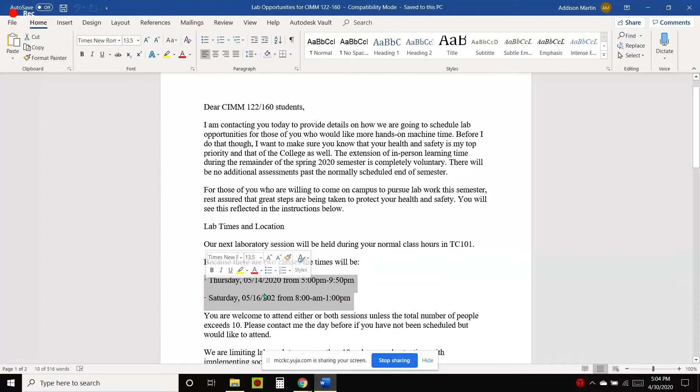I've got this Word document that is kind of explaining the lab thing that's going to be the week after class is actually over, and pretty much taking the first 9 people really, because there can only be 10. And you're welcome to do this. I'm going to be down there on Thursday the 14th and Saturday the 16th during these times. And I'm going to post this as an announcement. But they will be requiring you to wear a mask. So all the information about that will be in here.

I just got this last night. They're kind of flying by the seat of their pants on this. So most of this terminology was provided in a letter to me. And I changed a few key things about it being totally voluntary and it doesn't go towards your grade. Some classes are different because they have different requirements.

But I'll post this after class tonight, and also my daughter has a recital. It will be after that. So a virtual recital, because I originally wasn't planning on being here tonight, but since her recital got canceled.

Do I need to finish CIMM 151? No internship. I don't think so. If that is the case, if they tell you you have to, I think you can start lathe, and worst case scenario, I can submit a class override for you if they say that you can't for some reason. Particularly, I think they like you to have manual lathe first, but I've seen people take manual lathe and CNC lathe at the same time.

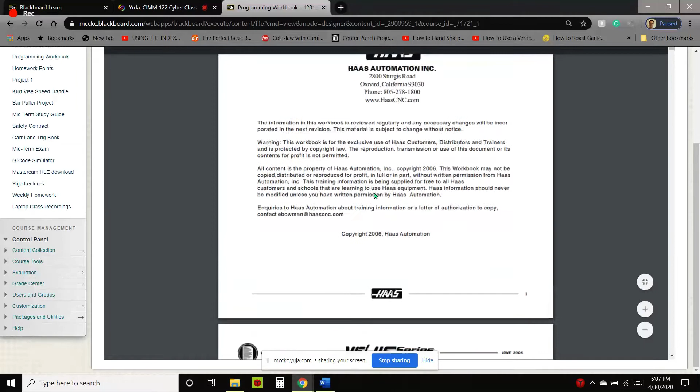So all right, everything that you need to know for the final exam is in the programming workbook. And the homework has really been structured around the final exam. And so just kind of go through here. You won't need to have your G codes memorized, other than filling in the blanks, just like the homework. In other words, it's going to be open book, open note, obviously, because why wouldn't it be?

I'm not really putting a timer on it, but it would be great for you to turn it in at least by 10 o'clock on Thursday. So we'll meet here next Thursday, and then I'll introduce the final exam and turn it on, and you'll be able to work on it. I'll be available for questions, but I'm not going to be like sitting here online, because that'd be dumb. So y'all can text me. I've got my cell phone right here, you know.

During the final exam, it's a comprehensive, like if you have a question about some verbiage or anything like that, how things are written. So this Haas manual is really well written for June 2006, it really is, because it's quite old at this point, kind of like I feel right now.

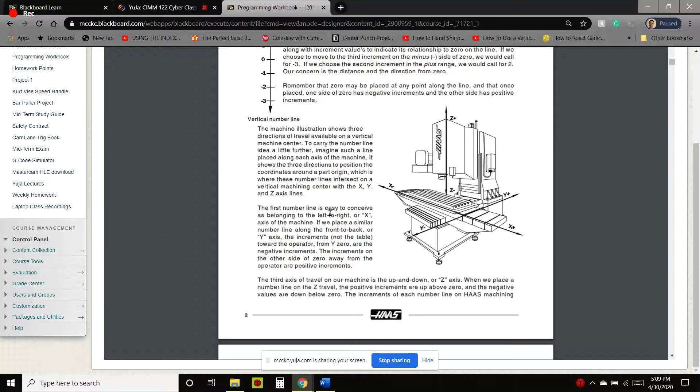So you might just kind of go through and review some of this coordinate system stuff if you need to. I haven't had a lot of required reading. For me, I always learn better by doing things, and I'm kind of a screw-it-up-yourselfer. I have to mess it up once or twice and then go back and finally do it the right way, and then I tend to not forget.

So this is real basic review here. The machine home is really, they're making it look like it's in the center of the circle, but machine home is over to the far right back. So it makes it a little easier to remember than this whole quadrant business. If I'm looking at the machine table and it's in front of me like this, anything that moves away from home 0 is going to be a minus direction. So this direction is X minus. This direction is Y minus.

By the way, I'm assuming everyone can see the workbook as I'm going through it. Yeah? Yeah. Okay, good deal.

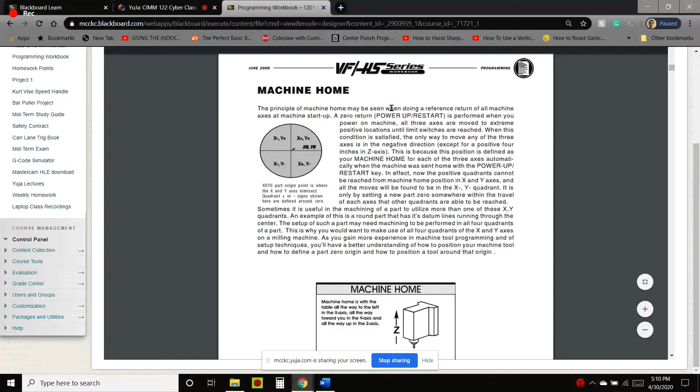So everything from machine home in Y going in this direction is going to be Y minus. And anything from machine home in Z, so this is a really great picture. If you're having trouble with your X, Y, and Z plus or minus which direction, this would be a great picture to refer to, because this is machine home. Anything moving away from machine home is a minus direction, Y minus, X minus, just like the arrows point, except this is pointing towards Z plus, which is confusing. So that's just that simple.

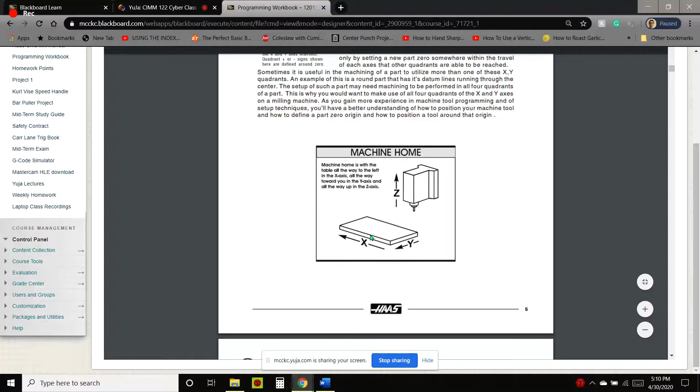The difference between absolute and incremental is as simple. I think the number line is kind of confusing, but it's always kind of difficult to explain things without using gestures. But absolute, again, is from wherever you position your part 0. Remember, we take our edge finder, position usually the fixed jaw of the vise in the left of the part or the center of the part in X and Y. And then we would make that our part home with G54 through G59.

But this position, my mouse wheel's acting up again. I really need to get a new one.

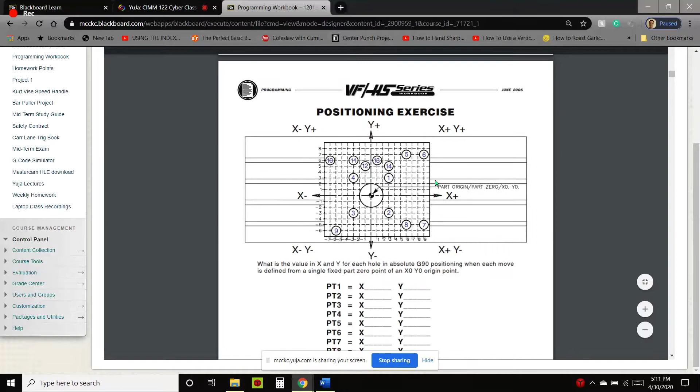I use my arrows. The machine position direction doesn't change. X minus is still, we're going way back to the first semester, X minus is still this direction. Y minus is still this direction. So if you remember which way minus is, then you don't have to worry about which way plus is so much. The G90 and G91, absolute, incremental. G91 is from one point to the next.

Jeremiah had a good point. On the drill cycle homework, he did his in incremental. So it was like G91, Y minus, whatever. You can actually use an L value with that. If you've got 10 holes and they're all an inch apart in X, you can say G91, X 1.0, L9, because your first hole would be drilled. And it would drill 10 holes.

It's really handy. I had a part at Procon that had like 1,100 holes in it. No kidding, 1,100 holes. I just meshed it and selected all the holes with Mastercam, but if you had to program that manually, it would be easier and take a lot less programming space to use an L command. Again, that's not going to be on the final. There I go, rabbit trailing. I was like, I'm just going to talk about stuff that's on the final, and I don't know if I can do that. I'm going to try.

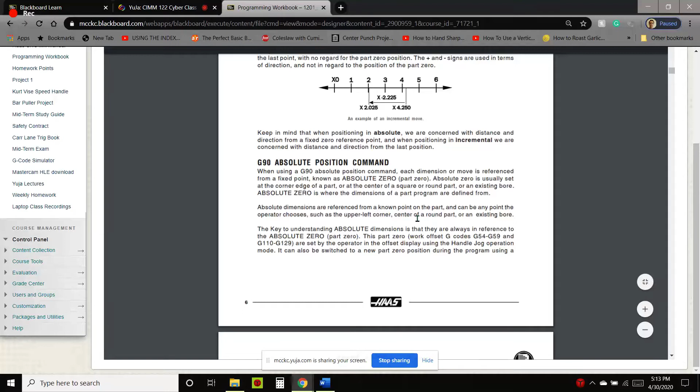So let's see. G91 is from one point to the next. So these are explained really well here. Does anyone have any questions about G90 and G91? That's probably going to be on the final in the form of filling in the blank for a program.

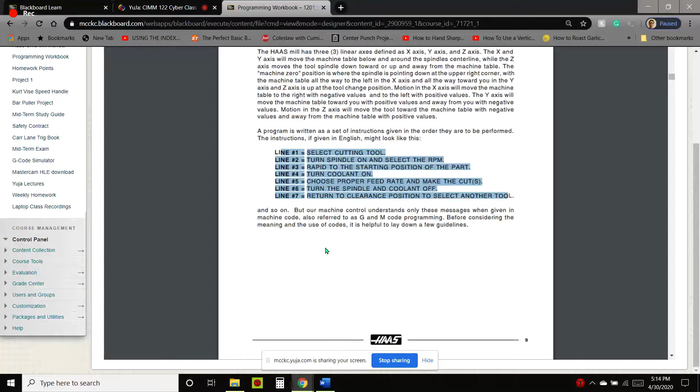So the format of the program on the final is pretty well spelled out for you. If you're in the advanced lathe class, you won't have that luxury. You're just going to get a drawing and then write the program from there. So a lot of this is review. It doesn't really apply to any geometry, so kind of skip over that. These are good things to know. I'm not going to spend a lot of time on that.

So the program's first couple of lines, and I had some of you guys sort of struggle with this. This almost never changes, other than where you're going to position X and Y, how fast are you going to turn the spindle based on your tool, and what is your tool number, because H1 and T1 always have to match in your program. M8, M3, these are all turning on your spindle, turning on your coolant for M8.

Good idea to tell it G90. Reason is because a lot of times before this line, you'll be in incremental taking Z home. And the last thing you want to do is leave this thing in incremental when you're repositioning your X and Y, because it's going to just move it from where it was to these values here, and it's probably not going to be where you want it. It's usually good to stay in absolute when possible. Seen a lot of tragic things happen by leaving the machine in incremental.

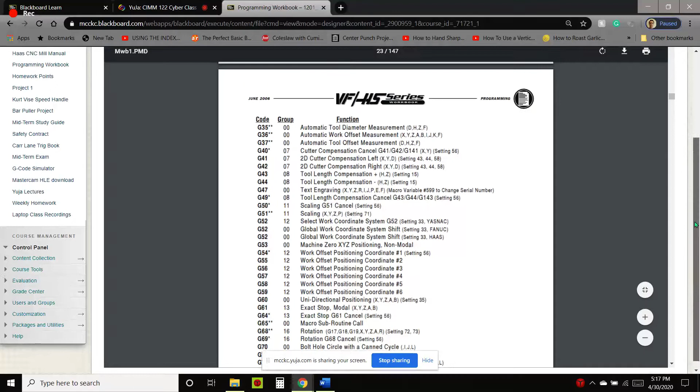You might want to keep in mind where this list of G codes is, because you're free to use the book for the final. So no more memorization. And my experience is that most past classes, I think this is my 5th time with this class, maybe 6, it usually probably takes more than an hour on average to do the final. 1 to 2 hours. And if for some reason you can't do the final next Thursday, you might just drop me a line. I'll work something out with you.

So these are your machine defaults. When you turn the machine on, this is what the machine is set to. So here's pretty much your safe startup line, with the exception of G64 and 69. We didn't really learn those. Exact stop is a thing that I believe is used if you have a problem with the machine overrunning. We run into that problem a lot with some of these flow toolpaths that just have thousands of lines of code and tons of processing. Sometimes the machine will get ahead of itself and it'll miss a point. And so the exact stop forces it to stop after every block. Just a little 401. That's not on the test.

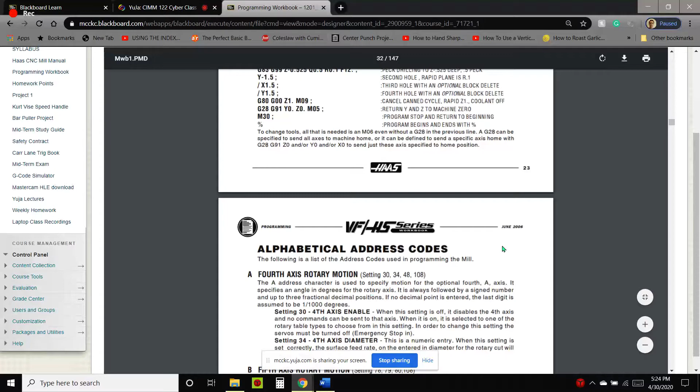One thing I do different than, I think, Dave Grady has a machining final and a written final. I've always shied away from that because I don't want people to be rushing around to try to get a part done and crash the machine. You know what I mean? So it just seems like a way more relaxed final exam, and nothing gets broken that way. I do the same thing in the advanced class. There's no real got-to-hurry-up-and-get-this-part-cut final.

None of this is really relevant. Well, I wouldn't say relevant, but it's not going to be something you're going to be quizzed over on the test. There's no I and J on the test, which some of you will be really happy about. Any kind of circular contours that you have to program are all done with the R value, and we'll review that as soon as we get to it. These are just kind of describing the different variables that you'll run into. So it wouldn't hurt to thumb through this week, especially closer to next Thursday, and at least have a good idea where stuff is in the book.

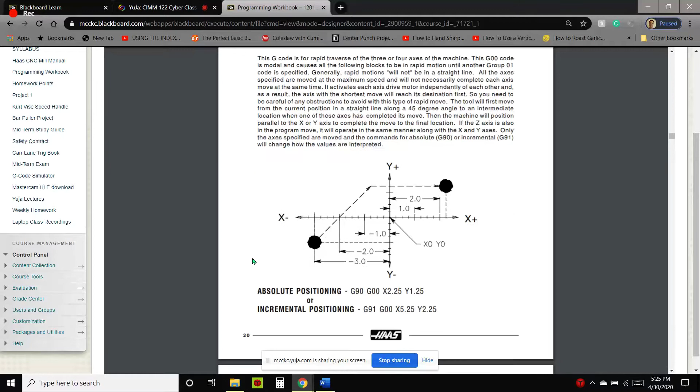Rapid positioning, a couple examples of absolute and incremental programming. Linear interpolation, so G0 and G1. Most of you guys get that pretty good. So here's a good example of a contour.

Now on the final, when you see your contour that you're in charge of programming, by the way, if you take the NIMS CNC final or written, it's a lot like this, where it might leave a couple things blank, and then you would have to fill in what the programming is on it. But pay careful attention to where your X and Y 0 is, because that is going to be,

That's my daughter singing with her teacher. Kind of distracts me.

So again, with cutter compensation, anytime you see this G41 or G42, you're going to program the exact geometry. And if you're struggling with this, it would help a lot to just circle each exact point that you're going to be programming on your contour. So in other words, this would have 1, 2, 3, 4 points. And think of it like an Etch-a-Sketch, where you're going to move Y up, and you're going to move X and Y, and then X.

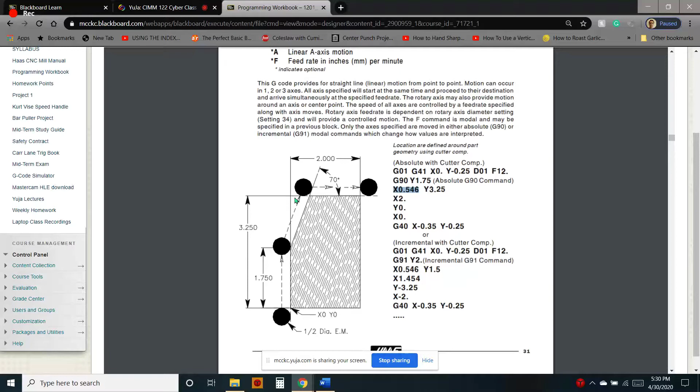So trigonometry is not hard, except my biggest challenge with trigonometry has been, where do you draw the triangle? Not solving the problem, because with trig apps you can solve the problem just by plugging in one side and one angle. In fact, SOHCAHTOA is kind of obsolete for me. I knew it at one time when I was studying for all my NIMS tests, but I quickly forgot it. It's not that it's hard, it's just one more thing to have to remember.

So trig apps are everywhere. Trig calculator, Symbolab. Oh, I don't think that's the one. No, that ain't it. There's trig calculators online, so even if you don't have one on your phone, which is what I recommend. Where is the triangle trig?

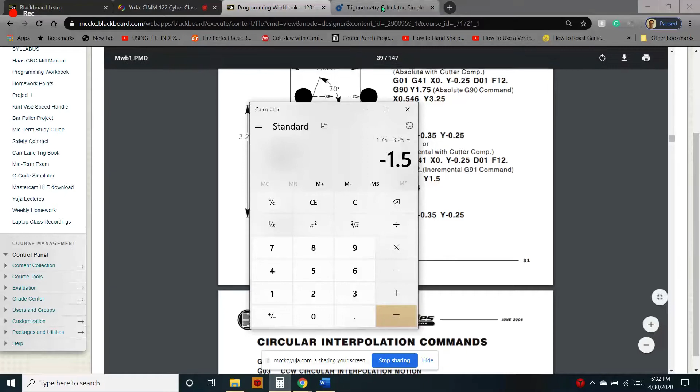So here's one. You can plug in any side or any angle and hit enter, and it'll fill in the blanks for you. So angle A is 20 degrees, and this was 1.750 minus 3.250, which was 1.5. I should have been able to do that in my head. And side B is 1.5.

See, it just fills in everything for you. So that's where they get that 546 right here. So X is 546 because it's just part of that triangle. Because from here to here is 1.5, 20 degrees here. Solve the whole problem with a trigonometry calculator.

Now there are people, like if you work at Honeywell or something, you're not going to be able to use your cell phone. But from what I understand, you do have access to computers, because they just don't want you taking pictures of stuff. So you could access this app from a computer or something like that.

And to me, it's just easier and faster than memorizing SOHCAHTOA, because you forget it really quick. Because most people say, oh yeah, SOHCAHTOA, it's, let's see. And by the time they do that, I've already whipped out my calculator and figured out solve the triangle. So the big point is this.

3.250 is exactly 3.250 from 0. 546 is exactly 546 from 0. And going to feed right over to X 2 inches exactly. So even though the cutter is on the other side of this, it knows to do that because you told it cutter radius compensation left.

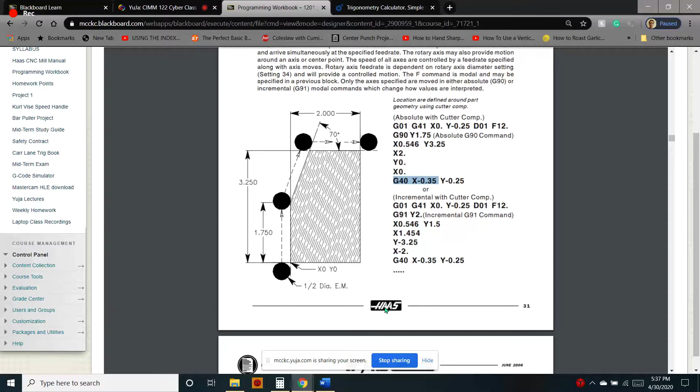I got shaving cream in my ear. Drives me crazy. You never realize it till you're. I got somebody calling me, but I'm not going to answer that.

Doesn't look like a student. If you have a question, you can just text me. It's probably somebody trying to sell me health insurance that I don't want to buy.

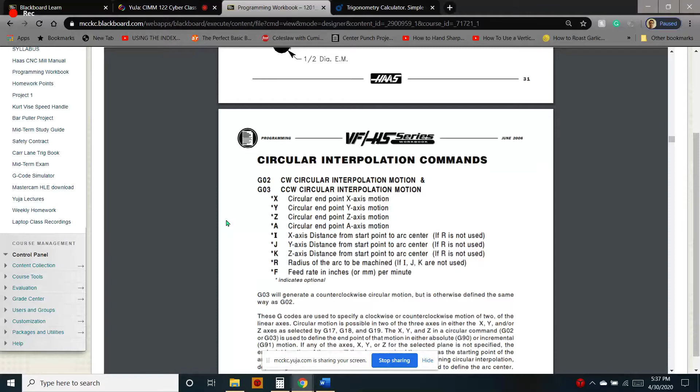Anybody have that? So we need to kind of go over circular interpolation as well. That's going to be on a contour. You will be responsible for programming a contour. You'll be responsible for circle pocket milling. There's sub-program involved. And so we're just going to try to cover the finer details of those things.

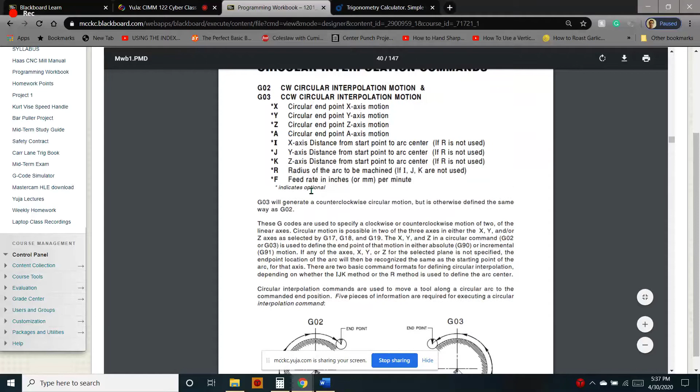So circular interpolation, I and J, you're not going to have to worry about. We've explored that a little bit. Just as a reminder, it's always a source of confusion. Even with the machinists I work with that do this all the time, they just forget. I used to struggle with it too until I started teaching it every semester. So when you explain it enough times, you finally remember.

But it's from the start point of your cut to the center of the radius all the time. I is always for X, J is always for Y, and K is for Z. And there are times where you will cut arcs in the Z axis, and that's where we get into the G17, 18, and 19 plane selection, which again you're not going to have to worry about. But we'll have to be able to cut a 90-degree arc as part of the contour. I'm pretty sure we'll run into that here pretty quick. So we're already halfway through the book.

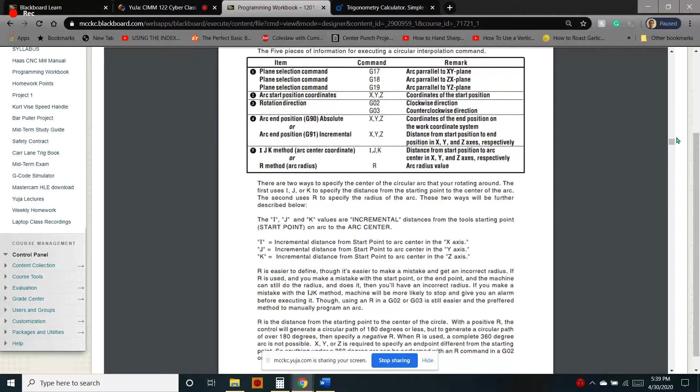Let's see here. These are some pretty thorough descriptions. Sometimes the descriptions are a little bit hard to understand. Now, this is an example of programming an arc without cutter comps, okay? And so we don't want to get this confused with using cutter comps on an arc, because the radius changes from the actual radius, which if this is a 500 radius, by the time you add the half-inch end mill, which has another quarter-inch radius, adding those two together is going to make that a 750 thousandths radius.

And so if we were manually programming this without cutter comps, the actual radius that you would program would be 750, because it's got to go another 250 to make it to the center of the cutter, which looks fairly understandable here, but when you start cutting parts of radiuses and segments of circles, it just seems like every job I come across.

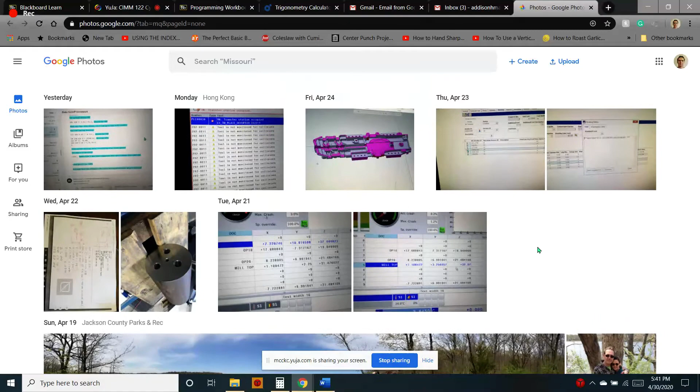We're looking at this one job. I should have brought the step file home because it's a mold for a dog biscuit, right? A dog biscuit, but it's got a twist in it. In fact, let me turn on my Gmail here, because I took a picture of it today, hopefully it's synced to my phone. And you guys won't try to hack into my email, surely. Let's see, pictures, photos. Sorry. No, it didn't sync yet. Rats. These are the big, large castings we're working on. This thing is like 4 feet long. Oh well, sorry about it. You'll never get those 10 seconds back. Does anybody have any questions right now? Okay.

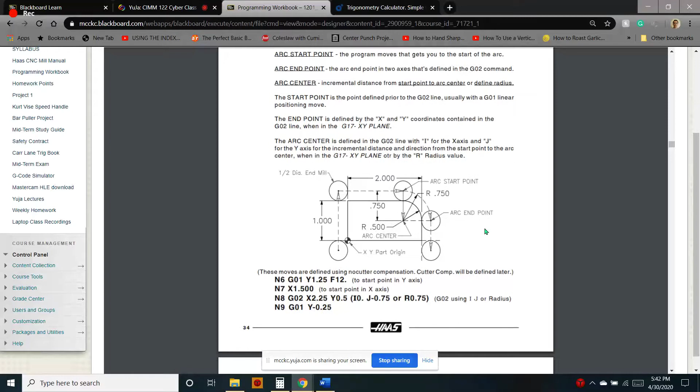So anyway, this thing's a mold for a dog biscuit, but for some reason somebody decided the dog biscuit would be more appealing to animals if it had a 15-degree twist to it. That'd be a reasonably easy thing to make, except now it has a twist to it, so you'll have to put that on a 5-axis machine and use swarf tool paths and all kinds of fancy things to make it. The dog does not care, but I guess the marketers do.

So anyway, what we want to look at more is the cutter comp. If you're doing review, ignore this example, because it's showing you how to cut this radius without cutter radius compensation. So this would be more of your example to look at, where it just gives you the points. So here again, be sure you know where your XY origin is.

So they've got a G2 X 2.250, which is 2 inches from, this one's confusing to me. So this is 2 inches typical. I think this is actually without cutter comps. This is not using cutter comps. That's what we don't want. We want this one. No, that one still is not using cutter comps. Those are both really bad examples anyway. Let's find a good one.

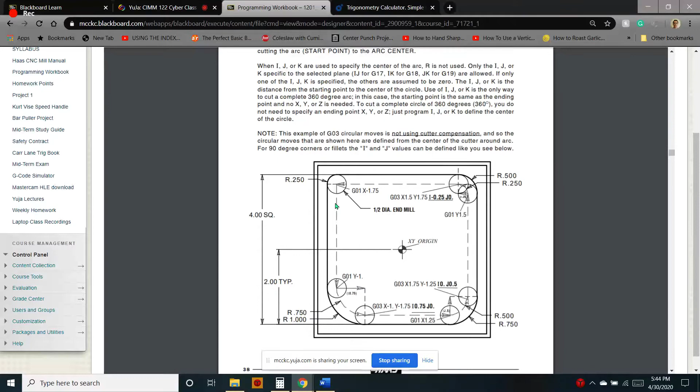I think the one right before the actual interpolation exercise is probably the best one for examples. That's an internal pocket. Could have sworn they had a way better example. So for an internal pocket, which I don't think you have to do an internal arc. They're a little bit more tricky. 1.250. That's a really not great example.

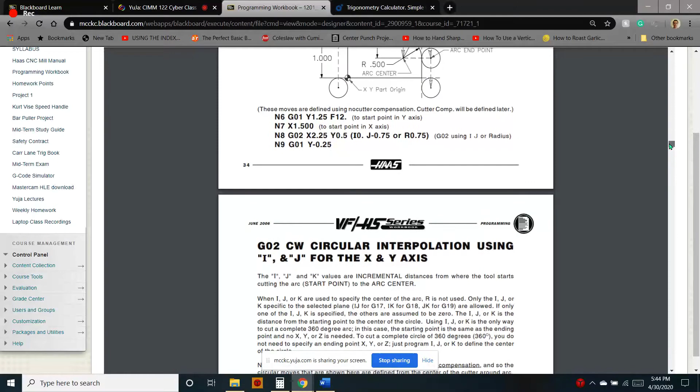Of course, my mouse is being ridiculous. Probably this example right here. No, they're still using non-cutter comps. Well, hopefully we'll run into a better example.

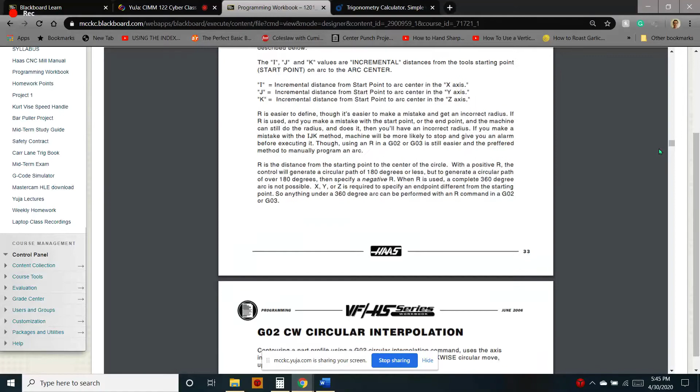I guess we could just go review the homework. If you have your homework, you can review it. It's been graded and corrected. Everything's correct. Page 61 in the actual book. Okay, we'll get down to that then. Thanks, Joe.

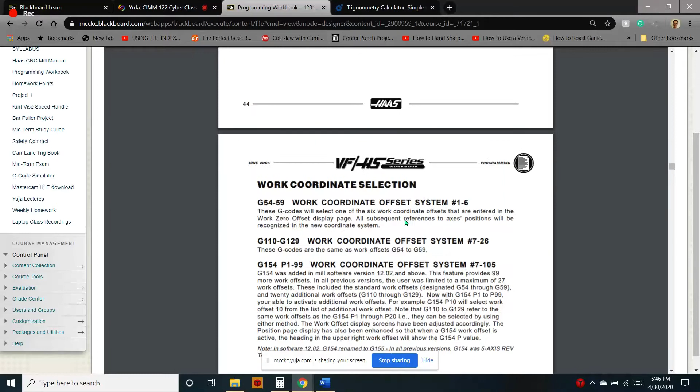So your startup lines, all the information that you need to get through the final is in this book. You're not going to have to go from inch to metric, but if you ever did, G20 and G21. Work coordinate, just remember that G54 and G59 pretty much are the exact same thing. They're just if you want more than one work offset. If you remember when we were down at the lab, I was saying it would be smart to make all your work offsets G59 because then no one would mess with it from week to week because they'll be using G54 or G55.

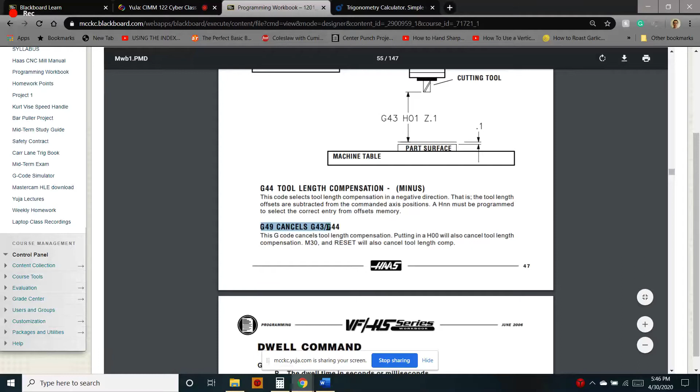Tool length compensation, that's G43. Basically solves the problem of every tool being a different length and you want it to go to 0. G43 makes up that envelope difference. G49 cancels it. We have not used that in the class, so if you have an extra G code at the end of your program and you're wondering what it is, it's probably a G59 or a G49.

We haven't used dwell. That's G4 with a P value, usually in seconds or milliseconds. Sometimes you might want the machine to wait for a second. Sometimes at the bottom of the hole, if there's so much tool pressure, you might give it a quick dwell to allow the cutter to cut the rest of the metal out of the bottom of the hole.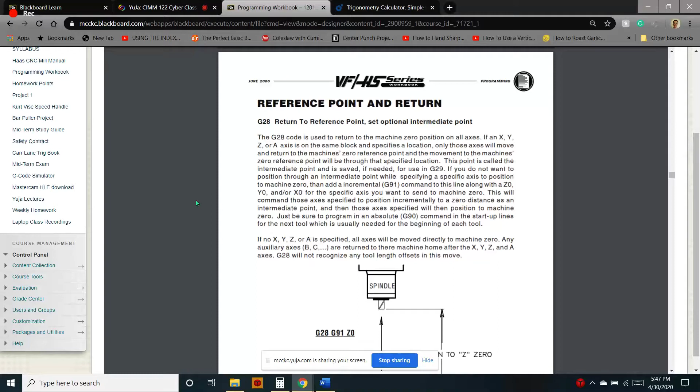Another time I've used a dwell is if I've got chips that are needing the coolant to blast them off the end of the tool. Sometimes I'll put a dwell cycle in there, or G4. It's not a cycle, it's just a G4 to give it an extra couple seconds to blast those chips off the end of the tool. Try not to use dwell because it's a production delay. Okay, G91, G28, Z0 is a rapid to Z0.

Did we use dwell on the counterbores for the spring housing? I don't remember. It's optional. Normally, again, I don't use dwell because the tool will tend to rub. If a tool is rubbing, it makes it dull more rapidly. The other way to return to machine 0 is this G53 command. Again, we just leave the G49 out. It's almost getting to be kind of an obsolete code because I don't think you really need to use it at this point.

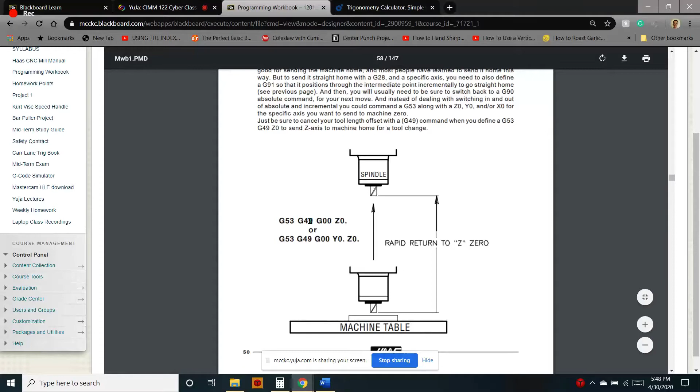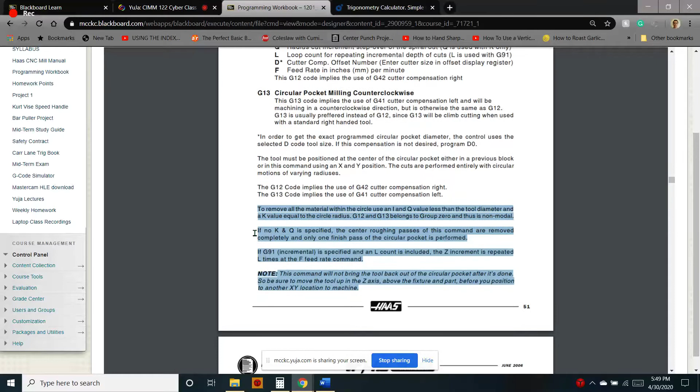All right, circular pocket milling is something that I would need to review because I don't use it that much. So these are your different values. I would probably keep this handy because you will need to refer to it unless you, unlike me, have the circle pocket milling totally memorized. But we can go through these examples together.

So we're calling up the tool number and the tool change. We're positioning the X and Y to the center of the circular pocket, turning the spindle on at 1910, and we're G43 within 100 thousandths of the part, which is pretty standard operating procedure. So we're telling it at this point G13 Z minus 0.375, I 0.5, and D15. So this code also turns on cutter radius compensation.

G13, I think G12. Yeah, G12 is clockwise. So again, if you're milling a boss, sorry, my mouse wheel is not being real super steady here. Go back to using my arrows. If you're milling a boss to climb mill, you would use G12. If you're milling a pocket, you would use, of course, I guess circular pocket milling is just for pockets, not for bosses. So forget that I said that.

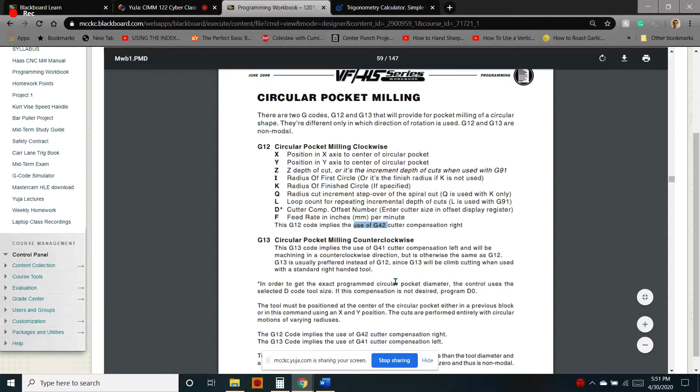But rarely would you use G12 because G12 will be conventional milling, and as it says here, G42 is always conventional milling. G41 is always climb milling. So the G13 is basically invoking the circular pocket milling cycle. The I is going to, best thing to do is just look at this example because rather than reading all that, it spells it all out right here. If you use this line of code, it's going to mill the entire pocket 375 deep. The I is the radius of the circle.

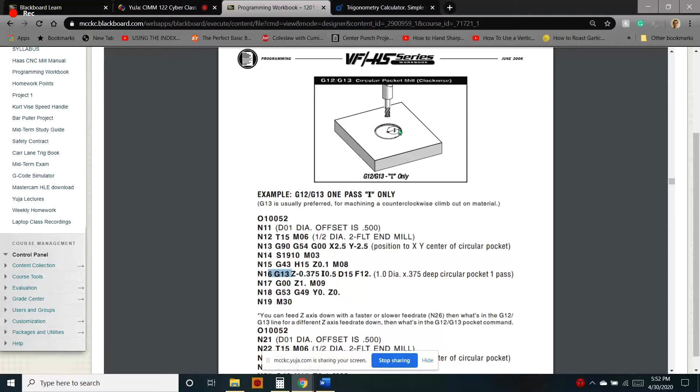D15, notice the D15 has to match the T15. It's just like calling up cutter radius compensation, except it's circle pocket milling. Bad thing about this is this thing's going to plunge into the part at 12 inches a minute, and then it's going to just move over and cut this pocket all in one swipe. So if you don't have a center cutting end mill, it's going to cause you problems. The end mill is going to get buried into the workpiece.

Now in this example, these two examples are pretty much all you're going to need to do the circle pocket milling for these three examples on the final. So in this example, notice all this stuff is the same. It's all the same.

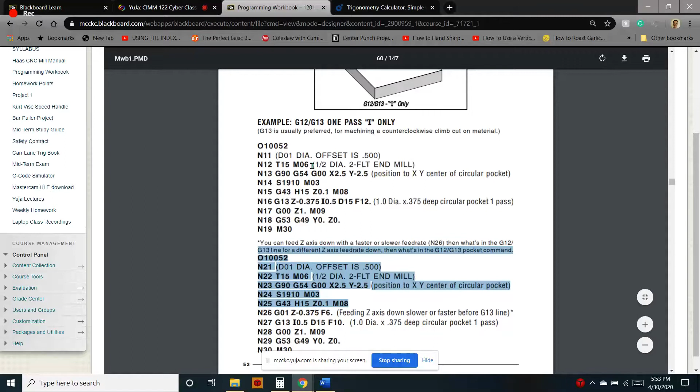So this one feeds Z down into the part. Notice they're feeding it in slower because sometimes you want to plunge at a different speed than your feed rate. And so this is telling it to pretty much do the same thing, except it separates the initial Z move out of the line. So you don't have to tell it the Z move in this line. The reason you would do that is if you wanted a different feed rate than the 10 inches.

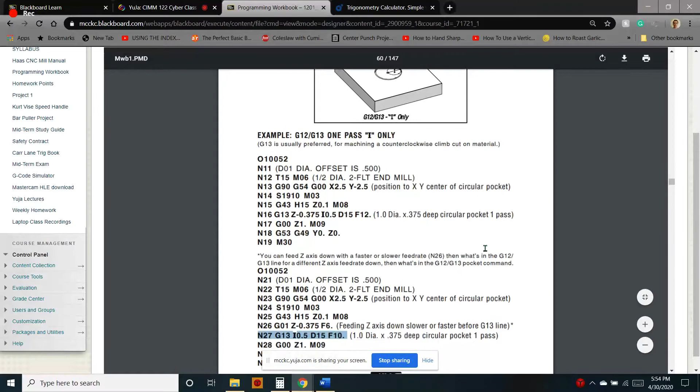So this is still going to cut the, and honestly, this isn't a whole lot different than the way I program with a G3. It just moves it over for you and then cuts the circle. And I think it moves it back. So there's some advantages to it. The main disadvantage to me is having to remember the rules about it.

You can only do this on a Haas. So the problem is, if you had 3 different machine tools in your shop and only one of them was a Haas, you can only run this code on one machine. So I'm more in the camp of trying to make everything more universal. But Haas really loves its circle toolpath, so it's on the test.

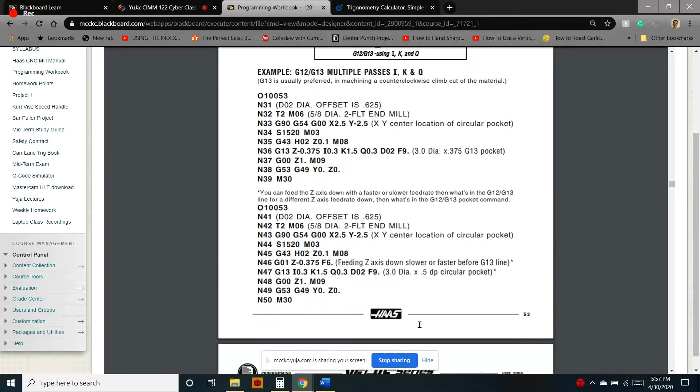The I, let's see, 0.325, K 2.0. Oh, it's a 4-inch diameter. So the I is sort of not super relevant. It's just the first circle as it loops into, basically going to arc into the bigger circle. Look at the I here, I 0.3. The K, again, is the radius. The Q is a step over. If we apply that same formula to this, and it's kind of a drag because it's down.

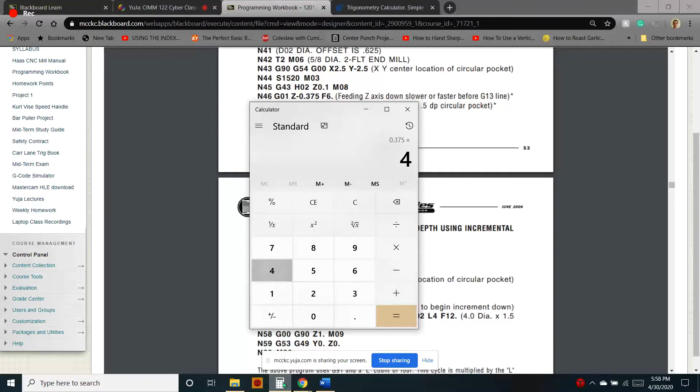So we have the I 0.325 is the first loop. K 2 inches is from the center of the circle where the X and Y is sitting. With a step over of 300 thousandths, D value again matches the H value, and the L4 says, hey, loop this 4 times. So 0.375 times 4 is 1.5. So anytime you see an L at the end of the line, it's going to loop that line that many times. So whether it's in a drill cycle or a sub-program call out, it's going to loop it.

So those are the 3 or 4 main different... Robodrills want tool change without G4. Oh, really? I believe that. So yeah, picky machine tools.

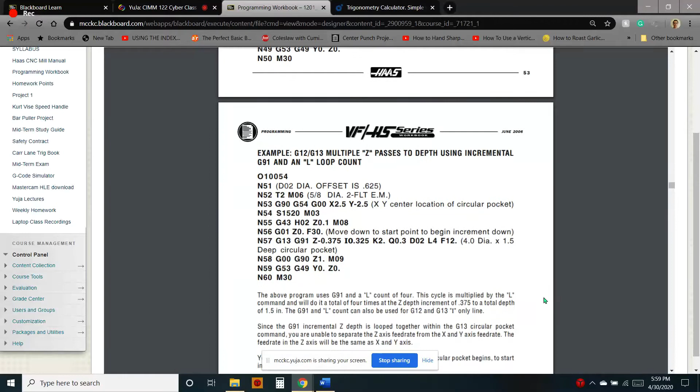So you'll run into different scenarios, and one thing you'll always find yourself doing is troubleshooting, because there's always problems when you're cutting metal. It could be software, it could be tool deflection, it could be breaking drills. We had a problem today where on our Heidenhain we're making these stringy chips, which wasn't a big deal when we were doing it on the big Kia mill, because they would just blow the chips off between each hole.

Well, it's not so easy on the Heidenhain because the weather's not so great in there because of all the coolant pouring down the side of the interior of the machine. And then the guy's got to climb up there, stop the machine, open this 5-foot tall door, and crawl in there and get the chips off the tap. So we started using a tapping cycle that has a retract, and he's still tinkering with it, trying to get it to work right. It's kind of a pain.

All right, moving right along. You're free to use your homework for study guides and things during the final. Open book, open source.

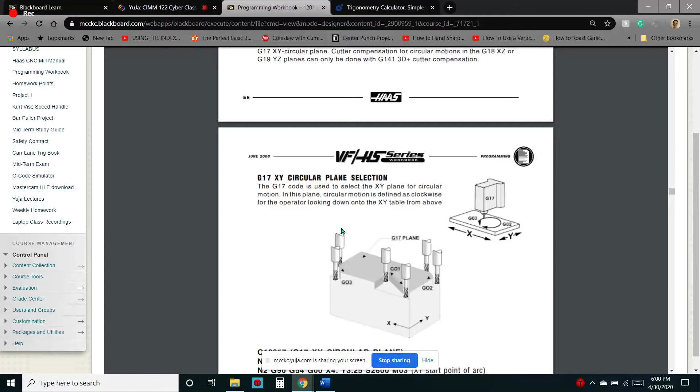Okay, so circular plane selection. You're not going to have to worry about that, but it's a good thing to know. One thing you want to be real careful about is if you go to a different work plane, say you're cutting a circle in ZX, and that would be G18, you want to make darn sure and go back to G17. I had a crash with that the other day because for some reason Mastercam will happily put it in G18 mode, but it won't put it back in G17 mode.

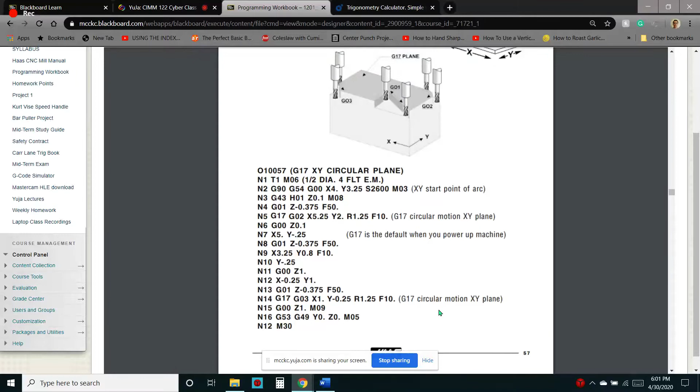So as much code as we spit out, I don't sit there and analyze every single line, but I do rely on the machinist to try to catch some of those, and I can tell you when they don't, they blame me, bad program. Like, well, you should have caught it, man. Standing there running it, right? Okay, so these are some examples of that.

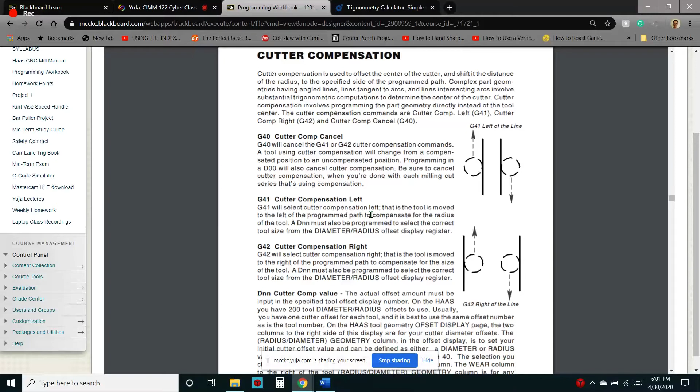It's important. We've already talked about cutter comp. I think it's way easier to remember an external feature or climb cutting is clockwise or cutter comp left, and then you don't have to worry about what the other one is. Okay, here's that page 61 that Joe was pointing out. This is a really good place to study your radii creation because it gives you the code right here. But actually, with cutter radius compensation, they're pointing out with these question marks, let me blow this up a little bit, a well-known deal.

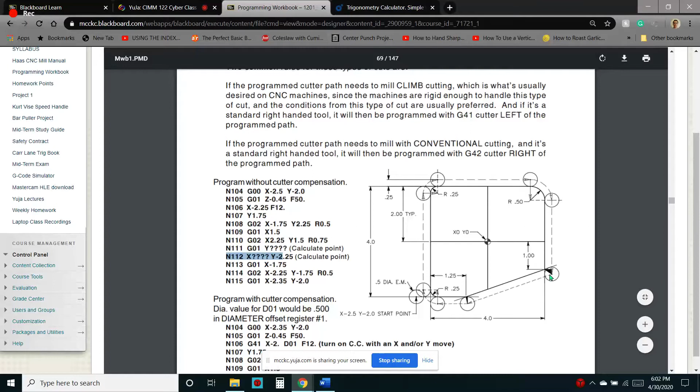We had that one class about the triangles, which I'm not really good at explaining, but you have to really trig all this out when you're not using cutter comp. That's why with the style of programming we're doing, we program the part path. It saves a lot of time. I will say there's a lot to be said for programming the cutter path because on some machines, particularly live tooling lathes, the further you deviate from the actual geometry of what the cutter is doing, the more it has a tendency to make mistakes or overcut. So when possible, it's a good idea to program the cutter path.

But manually programming like what we're doing, it's an option really. The difference is what your D value is. If you're programming the cutter path with a full size cutter, when you call out G41 D1, your D value will actually be 0. They call that wear programming. So as the cutter wears, and say it starts cutting 2 thousandths big, you would put minus 0.002 into the offset registry if the machine's set up for diameter.

Whereas with our style of programming, we want it to look at the thing and say, well, we're programmed to the left of the part, but the part is right here. So when we call up our D value, we put our cutter diameter into the offset registry. So just because we're doing it this way here doesn't mean that you would be doing it that way at the shop that you work at.

There are different ways of doing it, and 99% of the time, if they're using CAM software like Mastercam or SurfCam or Esprit, they will be programming the cutter path because it's a more accurate tool path, all in all. It's just like pushing the post button. You don't have to do all the calculations for the contours. So let's just review this contour real quick. We're moving along pretty good. We still got sub-programs, some drill cycles. I wanted to review the R points, things like that.

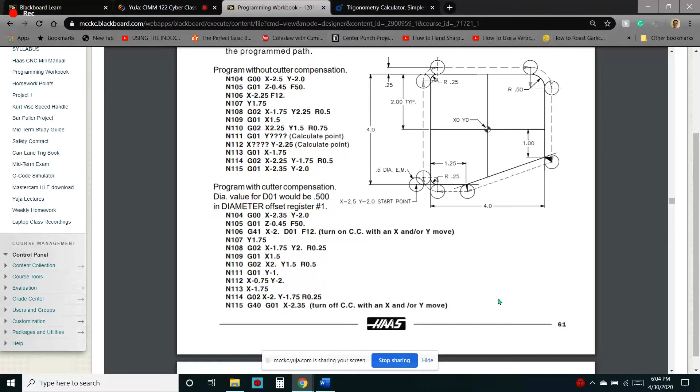And if you can have a good comprehension of what we've gone over with the programming up to this point, you can make a lot of stuff on the mill. A lot of stuff. So let's just have a look here. First thing I'm going to do is say, okay, X and Y0 are here, the center of the part. You got 4 inches, 2 inches typical. So that makes this super easy to look at.

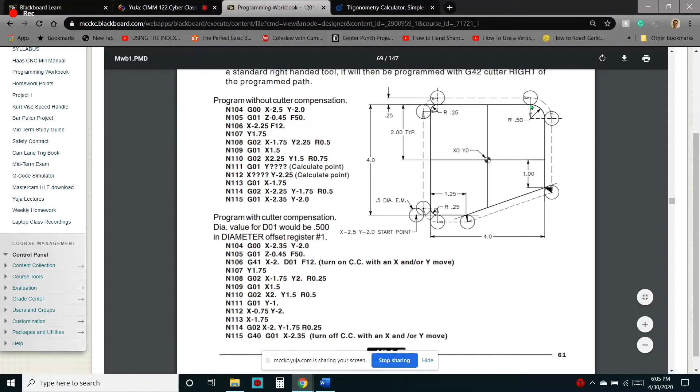If you're struggling with radiuses, or contours, this is your example. This would be the example to study. Think of each one of these points on the geometry as a point. You could even go through and draw a little circle around each point. Their points are from the center of the cutter, but we're not programming that way. We're programming the exact geometry.

So we're going to rapid down to our start point. So it's X minus and Y minus. So we know we're going this way because both are minus from 0. And cutter diameter is 1/2 inch. So the radius would be 1/4 inch or 250.

And we're minus 2.350 in X. So we're 100 thousandths away from the X. And we are Y minus 2 inches because 0 is actually here. So we're Y minus 2, X minus 2.350, which has us off the part, but right on the Y.

So we're going to drop down to G41 into X minus 2 inches. So we're going to have this G41 here. It's going to cut right into the part. It's going to actually overcut and gouge the part. But since G41's there, it's going to say, oh, I'm going to disappear. Kind of like the cutter witness protection program when you turn on G41. I'm going to use that again.

So that's just putting it right here. Let's see, X minus 2 inches, Y minus 2 inches. So it's right on the corner. And we're going to G41. We're going to feed up to Y 1.750. So here's where the cutter cutting the radius comes into play. It's 4 inches divided by 2 is 2 inches.

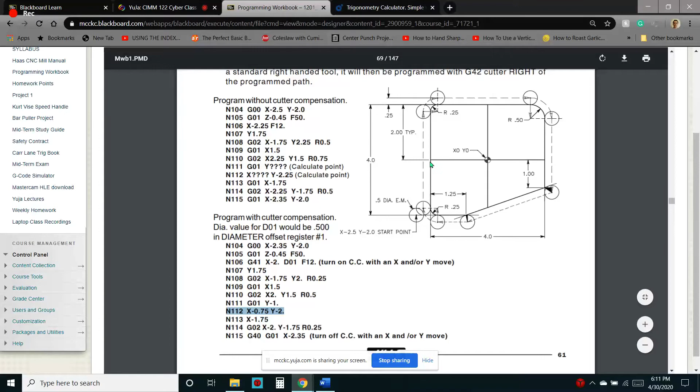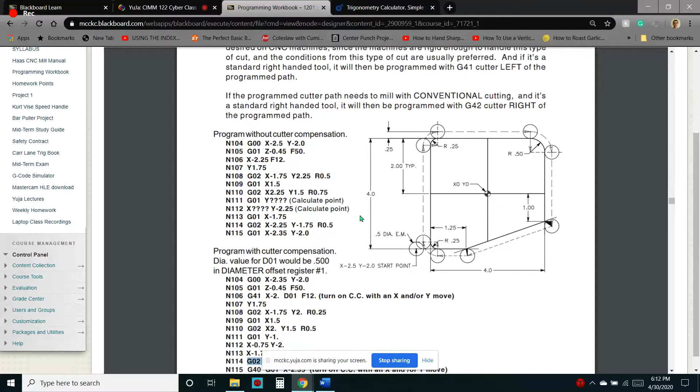And then it cuts this last radius. 2 inches, and then Y minus 1.750, because same deal, from here to there is 2 inches, minus the 1/4 inch is the end point of that arc. So I think that will be the extent of the knowledge that's required to cut the contour on the final. So if you understand that, you're in good shape. If not, maybe just review it as best you can. If you still have questions about it, you can text me or call me. I want to make sure you guys understand it.

All right. Any questions? Nope. Not visibly, anyway. I feel like I lost a few people. Let's see who's all here. Oh, we got quite a few here tonight. Welcome to CIMM 122. This is actually our last online class. While everybody's here, I feel like some of you may drop out.

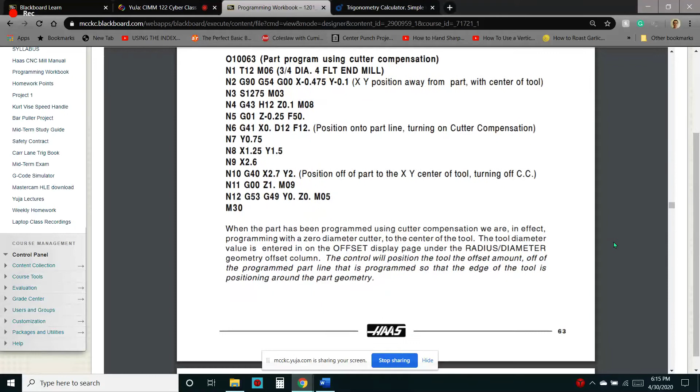Can you cut a 360? Joe asked if you can cut a 360 circle using an R. I think you can. I've never tried it because I always use the I and J. So that would be a good reason for you to go down to the lab and try that. But for the most part, I just use I and J to cut full circles.

So this is kind of explaining more of why, some different options with milling contours. So cutter compensation exercise. Some of y'all still need to turn in homework.

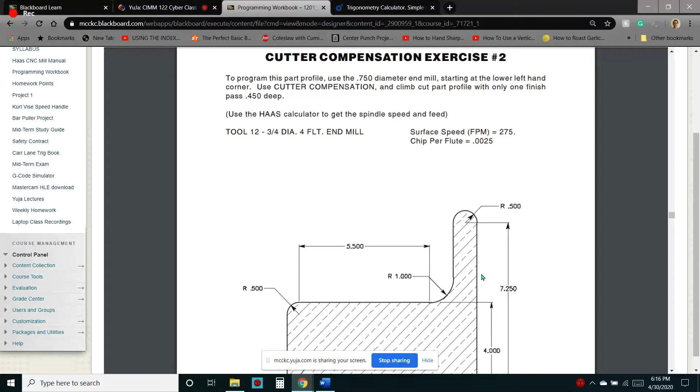I'm not 100% sure of the reason I asked you, as you said a few minutes ago, that we would use... Yeah, you won't be. Well, you'll use I and J with the circle pocket milling, as it's used in the circle pocket milling, but you won't need to use I or J to cut the radiuses on the contour. Does that make sense? Like for the final? Yeah, for the final, when you're cutting a simple radius like this, you won't have to use I and J.

So let's see, gonna go on. Didn't do thread milling. Thread milling is not on the final. We were going to do a little bit of thread milling. It wasn't going to really be thread milling, though. We were going to use a thread milling tool to cut the grip wheels. And I did have the bright idea to do a helical motion on the grip wheels going both ways.

Keep spitting on my computer. That's why we're supposed to wear masks.

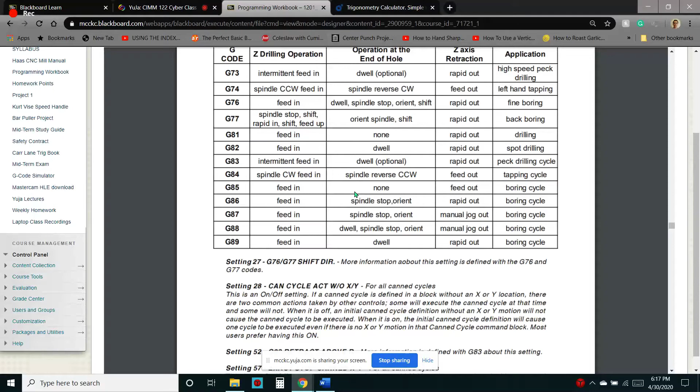And try to effectively cut a knurl by doing helical motion going one way and then the opposite way. But it turned out that doesn't work because they only intersect in one spot on the wheel. So I spent a whole class on that. Sometimes you just gotta experiment with things.

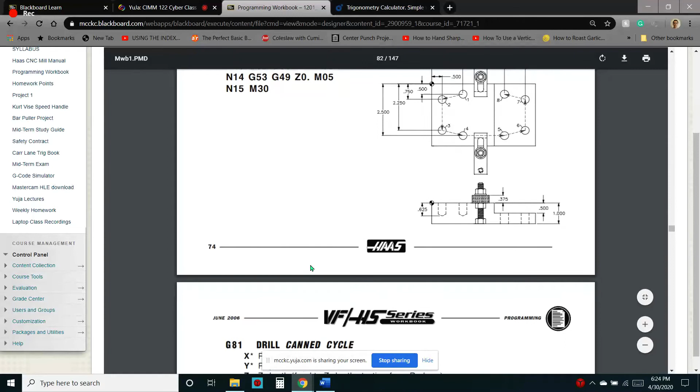So you should be pretty good with your drill cycles. G81, G73, G83, G84. This is a really great example. If you wanted to study drill cycles, I recommend some of these diagrams that we're looking at. If you want to write down some of the page numbers, a picture's worth 1,000 words. So page 74 on down really describes, here's your G81. This is going to be your spot drill.

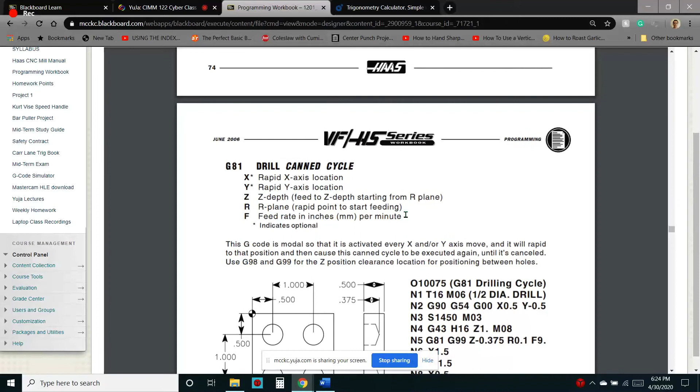One other thing before I forget is speeds and feeds are going to be important. If you are given a tool diameter and you're given a surface feet and a chip load, you should be able to calculate what your RPM is and what your inches per minute is. So let's do an example here. Say we've got a 1/2 inch 4-flute end mill, and we want it to run not 1,000 RPM. We want it to run 100 surface feet. We'll keep it simple. 1/2 inch 4-flute end mill, 100 surface feet at 3 thousandths per rev per flute.

Okay, so remember the 3.820. That's basically 12 divided by pi. No, I always do that backwards. 12 divided by pi. You're basically putting pi into feet by doing this. We round it up to 3.820 because it's easier. So it'll be the 3.820 times your desired surface feet. And this is in the book, too. Times your surface feet would be 100, so we got 382. That ain't right. Yeah, it would be divided by 0.5, which is the diameter of your cutter. You're going to run it at 764 RPM.

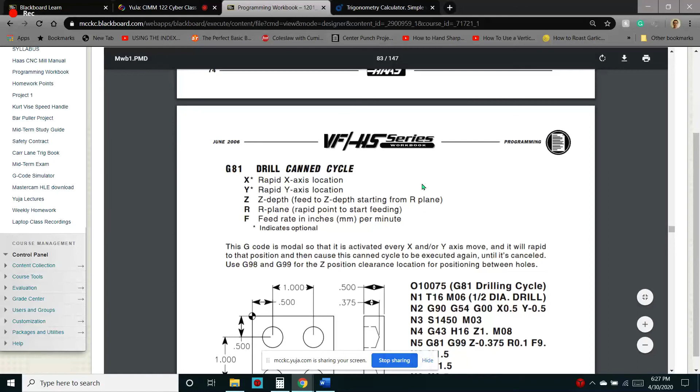By the same token, find out what my inches are. You always find your RPM first because inches per minute will be 764 RPM times 3 thousandths per rev, 0.003. Now you've got 4 flutes, so you got to multiply that times 4. So that's going to be 9.16, or actually 9.2 inches a minute if you want to round it up. Anybody got any questions about that? That is the main speeds and feeds calculation you're going to need to know. I usually have it memorized how to figure both ways, but you don't need to do that. If I know my RPM, I have the inverse function for figuring out what my surface feet is, because when I was doing setups I would always make sure my surface feet were good to go.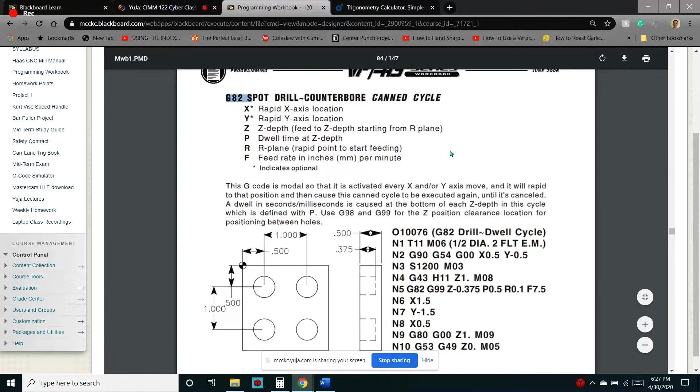Okay, so I've had people use the spot drill cycle. I'm not real familiar with that one, so I don't use it. I think the difference is rapid position, canned cycle, spot drill. Should tell what it does.

G82 is pretty much the same as G81. I don't really know what the difference is, and I don't want to spend a lot of time on it. So you can use either one, unless it tells you different. Be sure and read the instructions.

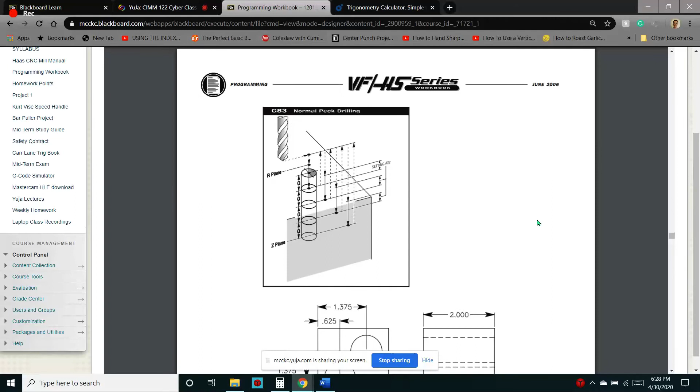Peck. So that's something that's a good thing to remember. That's when we have a full retract on our drill bit. And it looks like they say that's a G83. So these arrows kind of represent the tool movement. It's going to do a full retract, which looks kind of wonky. And then pretty much that, and then this review of sub-programs. I think that's about it.

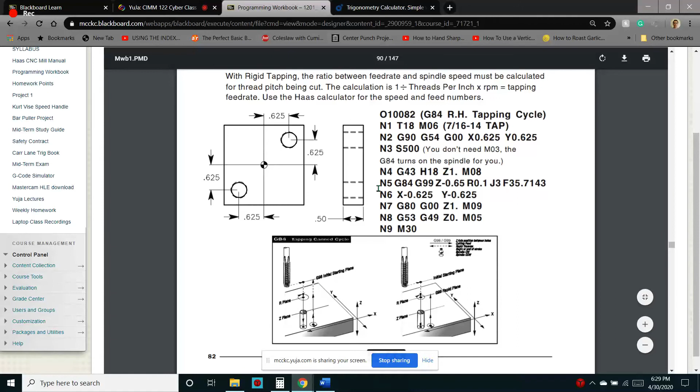So this tapping cycle would be another thing that you may have to calculate the speeds and feeds for the tap. So remember, the tapping cycle, it's always 1 divided by the threads per inch times your RPM will equal your feed rate, because with a tap, the RPM and feed rate have to be synchronized. So if I have a 10-24 tap, 24 is the threads per inch, 1 divided by 24 is that. Simply times, say I want to run at 300 RPM, it's going to be 12.5 on the feed rate. I just got lucky that it came out that exact.

I do try to get it to where it's down to 1 digit, but you won't have to worry about that on the final, so it's just another thing. Just the formula. We won't do reverse tapping. All pretty straightforward stuff we've been programming and doing, with the exception of pocket milling.

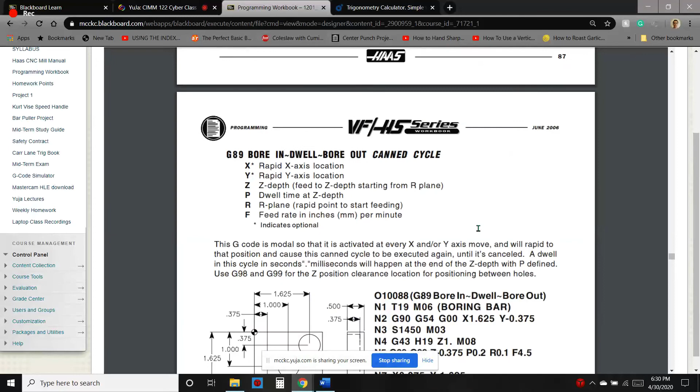Bore in, bore out, kind of like wax on, wax off. This is a good cycle because, yeah, we won't go into it. A lot of machine tools have different canned cycles that do different things. I try to stick with the big 4 that you'll run into. Not doing any of this. See all these bore cycles, so there's options.

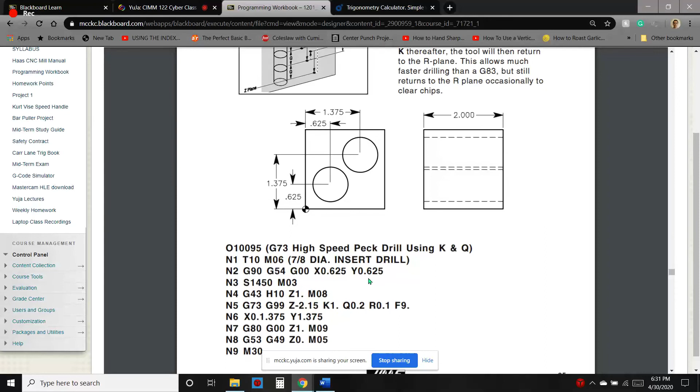Canned cycle exercise number 2. Wonder where it gets into sub-programs. High speed peck. So this is more of that shallow peck cycle where it doesn't fully retract every time. I find these diagrams to be kind of confusing, actually. I, J, and K. We're not going to do any of that. Remember, I kind of explained the IJK thing. The first peck can be deeper, and then each peck gets subsequently shorter with the J, and then K is the minimal amount, which is great, but it only works on Haas.

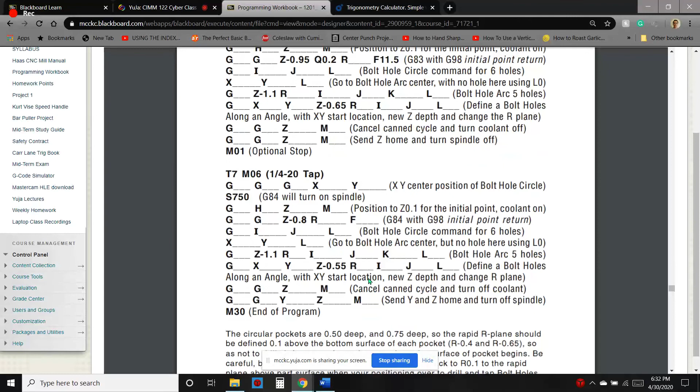G77. Back bore. Bolt hole patterns, not doing any of that. So yeah, Haas has some pretty cool features that it will do. Did I skip some programs? We're not doing canned cycle exercise number 3, because for one thing, we're out of time, but it uses a lot of this IJK stuff and it's bolt circles and things that are really super pertinent to Haas.

Subroutines. Okay. If you remember right, the subroutine is where we have duplicate data that we could run for each tool, whether it's the same group of holes or if it's a contour that's the same that we're going to run around 3 or 4 times. The subroutine is going to save you a lot of headaches because, for one thing, if you're going through with a drill, center drill, and a tap, once you're in your subroutine, if you watched it run once, you know that you don't have to worry about sending it to the wrong hole.

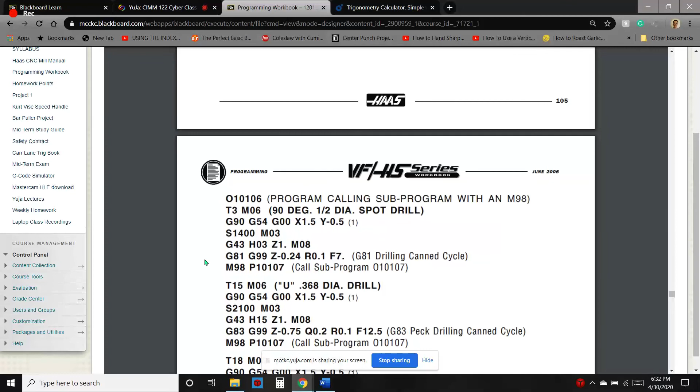There's an example of, it's pretty much the same example they use for other things, which is kind of nice. That way you're used to seeing it. But they're showing you how a subroutine can save you from calling all these holes out over and over again. So on page 106 here, it's going to be a really good example of a subroutine. Excuse me.

Anything that's different about the tool or the tool path has to be out in the main program. So if you look at this data, you got 3 different tools. So obviously this line's the same on all 3 tools, but you can't put it in the subroutine because you always want to position X and Y before you move Z. And so each tool has a different RPM. Each tool has a different H value. Other than that, all that information could go in the subroutine, but you just can't because this is different. Your feed rates are different. Now, you can pull little tricks and things, but if you follow this format, you'll do fine on the final.

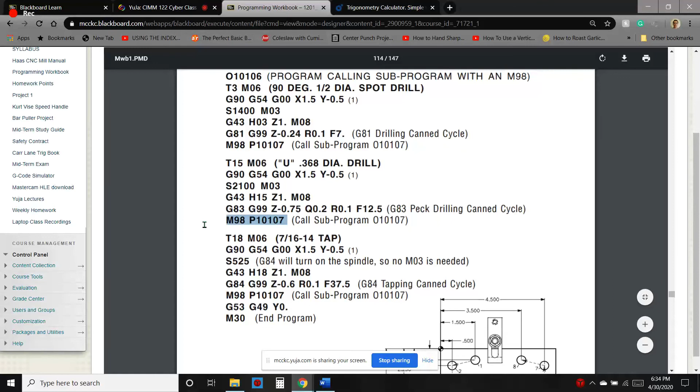Then they call out the subroutine, but there's nothing else after that. And the reason for that is everything after that is the same for each tool. For example, G53, all this, 49Z0, this is all going to be the same for each tool. So by putting it in the subroutine, you save 6 lines of code. So the rules are simple.

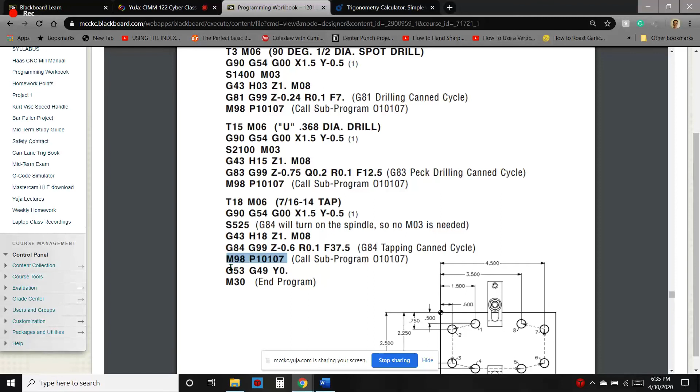I'm not sure if the final has a local subroutine or a remote, but I'll accept either one because we didn't do a lot with subroutines. But the difference is if you have a subprogram that is its own separate program in the program library, it's going to be an M98. If you have a program that is nested at the end, after your M30, it's going to be an M97. For both, returning back to the main program is M99. So that's going to loop back in.

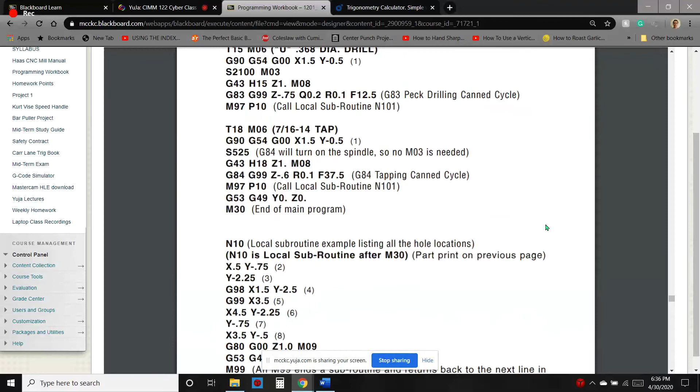And then this is the example with the local. So page 107, 108 will be your subroutine cheat sheets or program assist. We're not gonna mess with general purpose. That's as far as we go. So yeah, this is just going back to the same. This is the subroutine after the M30.

So here's your M30. Notice that they're calling out P10 here, but there's an N10 here. N10 is the name of the subroutine. You cannot use two letter O's in the same program. So the way Haas gets around that is by giving it an N value instead of an O. So anybody have any questions?

Any questions at all? Is there anything anybody would like to review some more?

Well, if you think of any questions during the week, or if you want, I think Joe was asking about copies of his homework. I said, yeah, they're in my deleted files. The reason I was doing that was because that way I'd know I'd already looked at it. But I think I can retrieve those and get them back to you if you've lost them or need to know anything else.